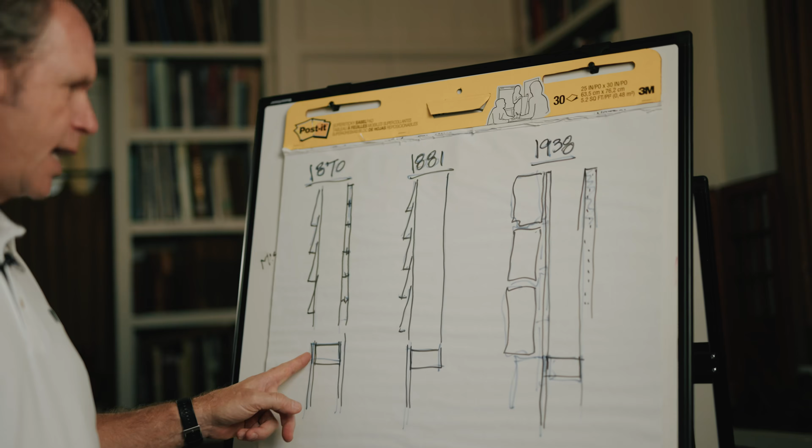Now, the 1870s house, we've got drop siding on the outside, and we've got beadboard on the inside. Both are historic fabrics that we don't want to mess with. We don't want to ruin the architectural and historic integrity. I can't put insulation in this wall, one, because I can't take off that historic fabric and get insulation in there. I can, okay, I know how to do it, but I don't want to do it because there is a historic integrity to this house that I don't want to mess up.

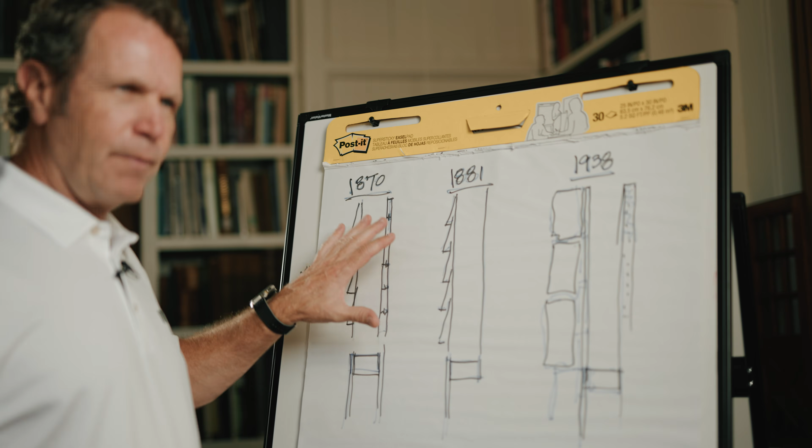And if I put insulation in this wall, if I blew foam in there and filled up that cavity with foam, the problem is that now I've got no air moving in that cavity. So if I fill this up with foam and basically stop any air movement, create a vapor barrier and everything else that foam would do, I have now created more problems for myself.

Because what happens is if I fill this up with foam, when water hits the outside of this building, it's going to sit there, it's going to get trapped right here, and it's going to cause rot and decay, and the paint will peel off because it can't breathe. And I've created problems by putting insulation into this cavity.

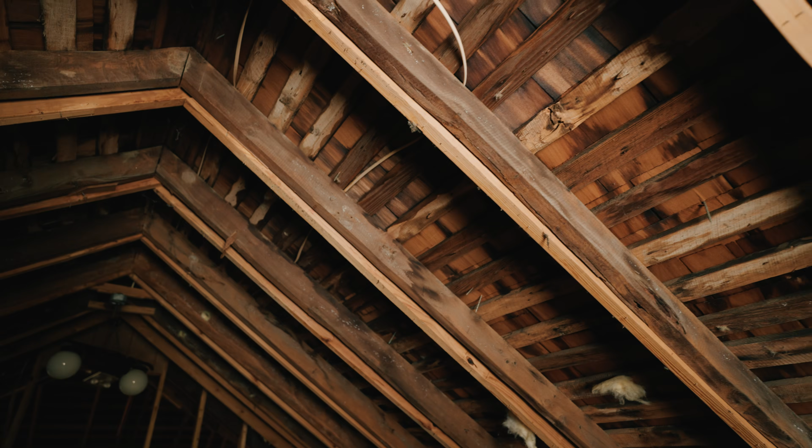The thing I want to encourage you, if you have a historic house, is the way to think about it: this house has been here for 150 years. 150 years. I do not want a solution that will provide them energy comfort for 10 years before the thing rots out and falls apart. I had a discussion with them and I said, what we're gonna do is we're gonna insulate your roof, we're gonna insulate your floor, but we're not gonna insulate your walls.

I don't like foam, right? I have had problems, and despite the fact that I've heard some building science people say that rotting of your walls with foam insulation doesn't really happen, it's an urban myth. Not true. It's happened to me twice. We've had two projects where water had gotten into the ceiling like a wet sponge in there, never dried, and the wood and everything else slowly started to rot. It probably was in there for a year or two.

And so it was embarrassing for me to have to go back to the owner when they call and say, by the way, I just stuck my finger through the ceiling boards. I think we've got a problem, right? It's embarrassing for me to go back and go, oh, what were we thinking?

Another project where water got in, wrecked the floorboards. The water got in behind the foam, flowed down the foam, went out the floorboards. We put our moisture meter on, check everything. It's not until we dig behind the foam and feel the wet against the wall that we start going, not only is foam either holding on to the water and creating a problem, or it's hiding the water and the water is getting through, and in that case, it was warping the floorboards.

So I have become an anti-foamer, right? I don't want to put something in my houses that's going to cause them to last a short amount of time. I fear that we are sacrificing longevity for short-term comfort. And so I'm no longer going to be using foam on our projects. Maybe in a crawl space, below where we get the concrete and everything wrapped at the base, maybe there with a closed cell foam, but when you get it into the walls and into the ceiling, I just had too much bad luck. I'm not going to do it.

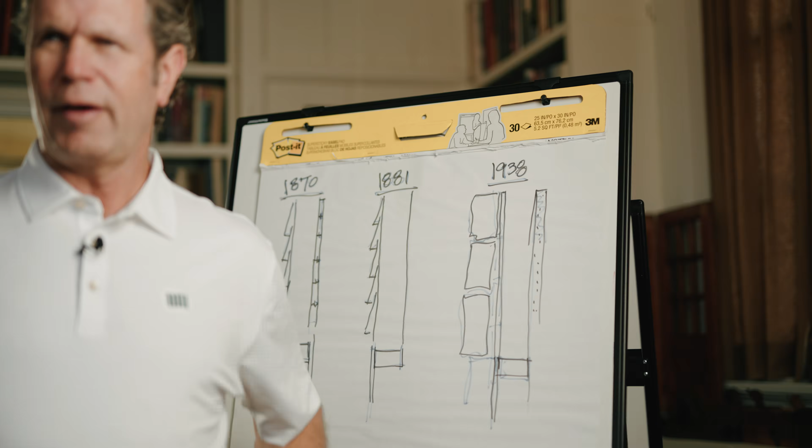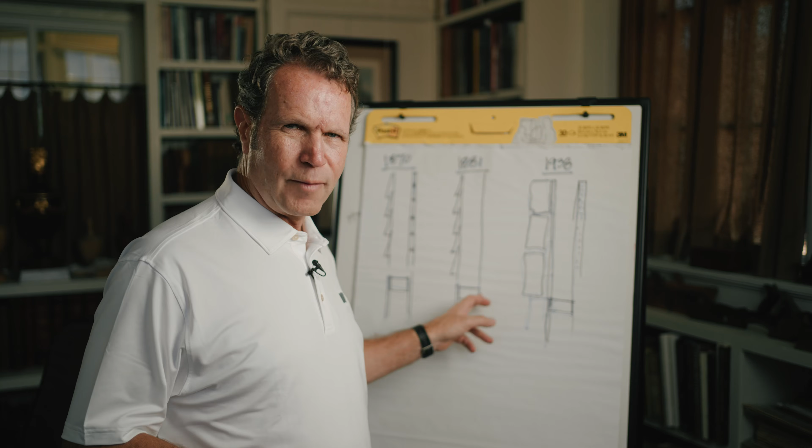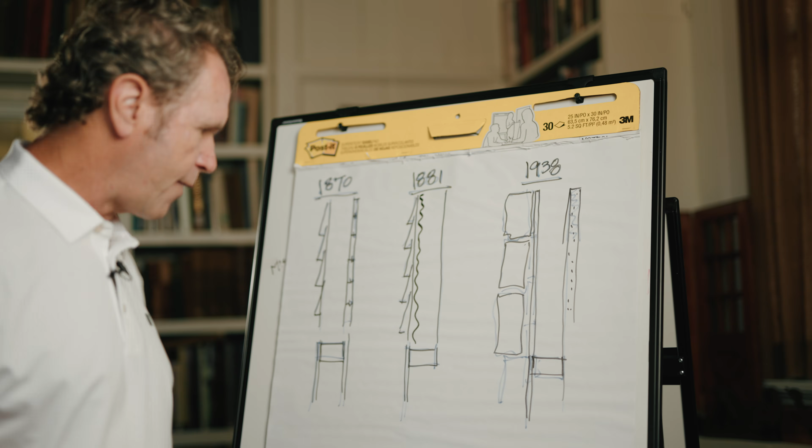House number two, 1881 in Granbury, right? We have the same situation. We have a wood studded framed house with an original drop siding on the outside. Now the difference in this house is that they originally had plaster walls on the inside, but those plaster walls have been taken off. So all I've got is sheetrock there. So now what I'm going to do is I'm going to come in here and put a dimple mat right there in the cavity, okay? So if this is my cavity, I'm going to take a dimple mat, I'm going to put it right like this inside that stud, okay? Then I'm going to put the rock wool insulation inside of that.

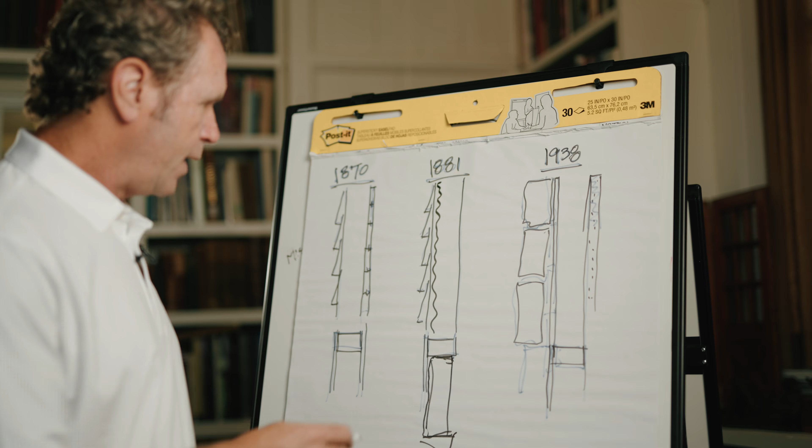Now why am I doing that? If I create an air gap here, right? So the air can pass up through here, right? I am not going to cause the paint to come off the siding once it gets repainted. I created that air gap there so air can still move behind there, so when this gets wet, it can still dry out. And that's really what's going to help this. You know, this is 140 years old, lasts another 140 years.

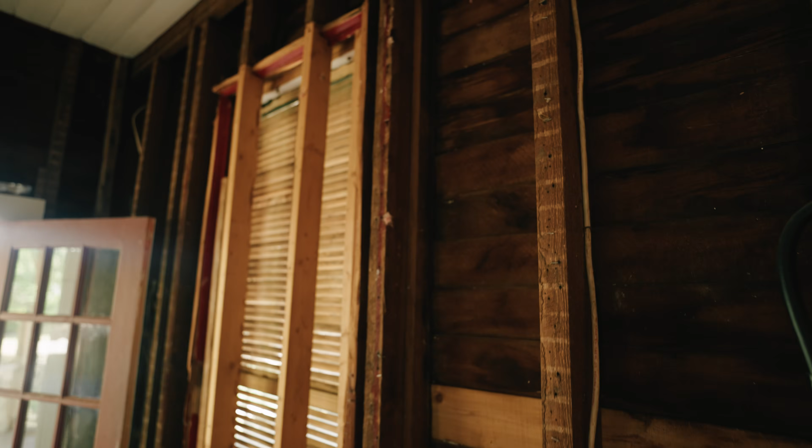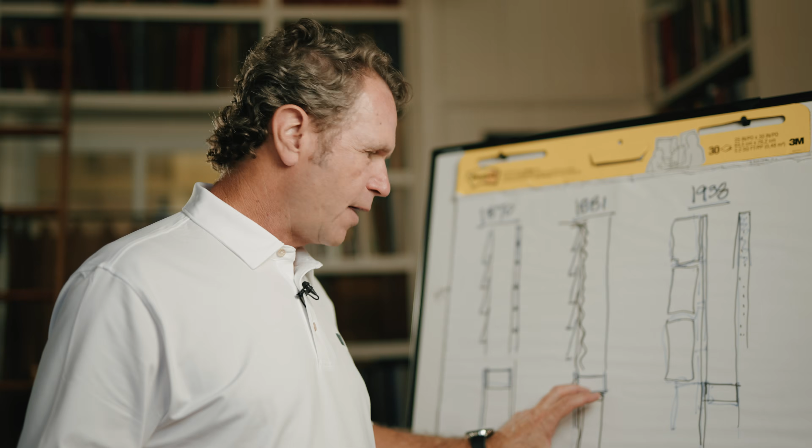But because I don't have anything on the inside, I don't have historic integrity like I do here, and I can't get in there and I don't have room and access to put a dimple mat in here. I have access here, so I'm going to take advantage of that, create the air barrier, fill up my cavity with insulation, and then put the plaster, sheetrock, whatever we decide to put back in there over the inside, and I have a lot more comfort, okay? So there's a situation where because of the access from the inside, I actually can insulate this wall.

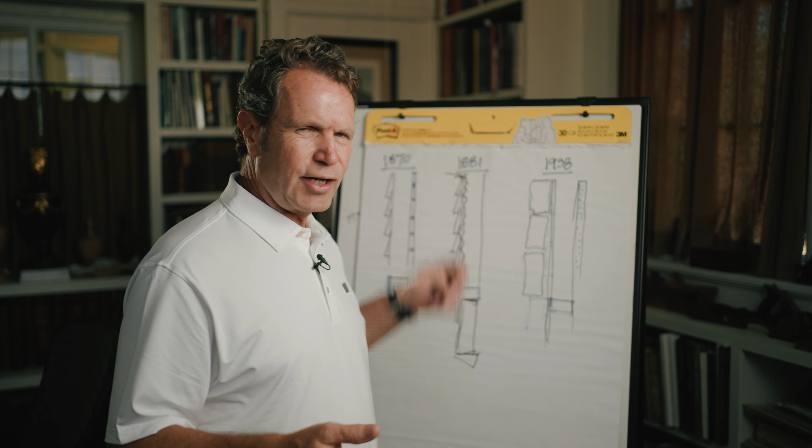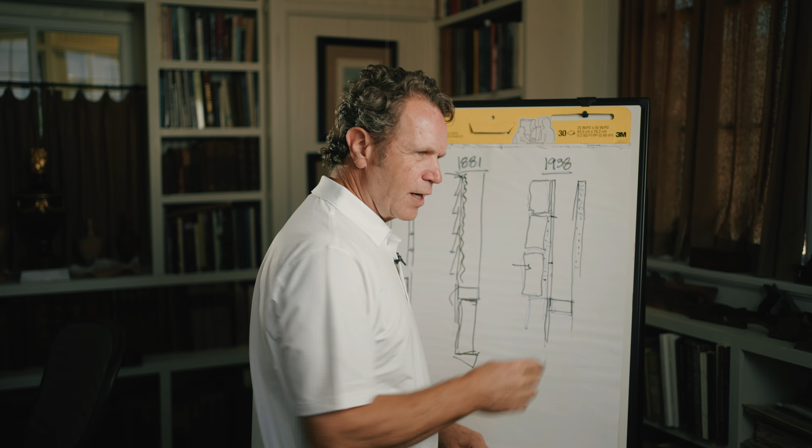1938 Dilbeck, okay? On this house, I have stone and brick on the outside, right? Then inside of that, I have an air gap, right? So I have an air gap right in here. And then I have sheathing, okay? So there's a shiplap sheathing on the outside of the house, probably with the tar paper. I haven't looked, but most likely there's a tar paper there. So I actually already have some things for the air to move. And if water hits here and it absorbs on here, it can actually breathe out again.

So actually, I don't have a problem with insulation on this house, and any exterior wall that we exposed, we do plan to put rock wool insulation on the inside of this house on exterior walls because this can breathe. It's a system that's been built, now it's 90 years old, right? And this system will breathe. This system, I can put insulation in the walls, so we are insulating this.

Okay, guys, so sharing this information with you because I know a lot of build science guys watch this channel, and a lot of build science guys are wanting to build the most efficient and perfect house. I want to throw in there that the balance is longevity. When we introduce new technology into these houses, air conditioning and these other things, it can create problems. It can create challenges. And the builder that's going to be building that house down there was like, why don't we just foam it up? And you can't do that, or you got to think carefully about how we're doing that in these houses. And I want to challenge you that for some of these projects, if you don't have air gaps and you don't have the ability to breathe, that insulation may not be the right answer.

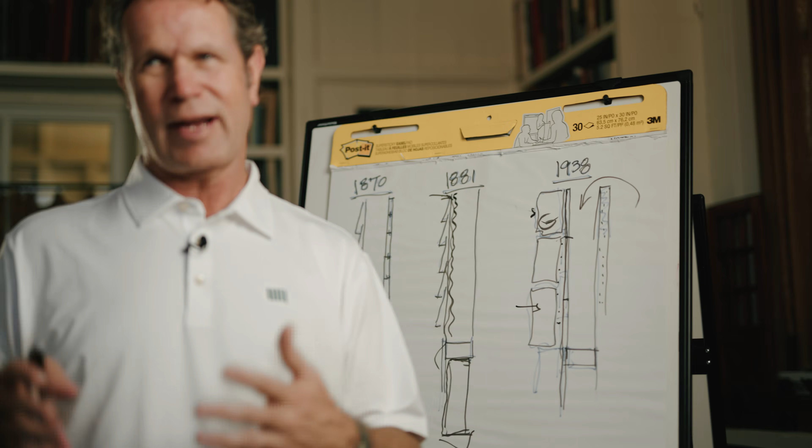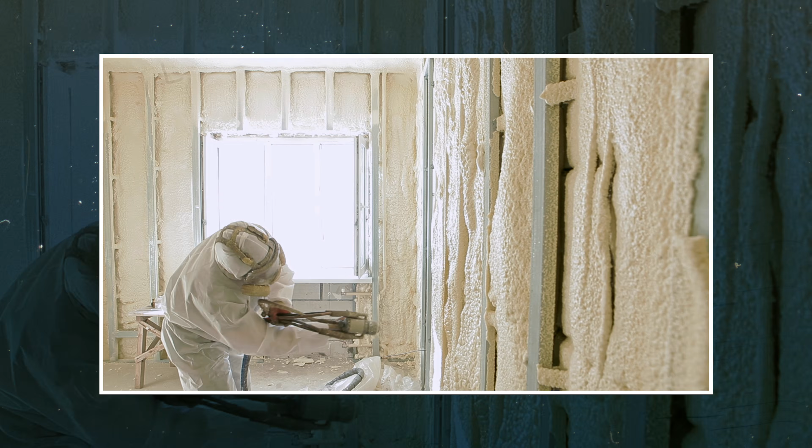And so I talked to the homeowner about the 1870s house and was just like, look, this house hasn't had air conditioning ever, and that's why I think it's lasted so long. But there is a balance, right? There is a thing that we're trying to strike, and I want you guys to find that balance too, but don't just open up your walls, blow in foam, and think you've done the best thing you can. We are pivoting towards rock wool. We think that is a great solution. We think that those guys make a lot of sense. Learning to become a better builder is a constant step of managing, thinking, watching, figuring out how to build best, how to build right.